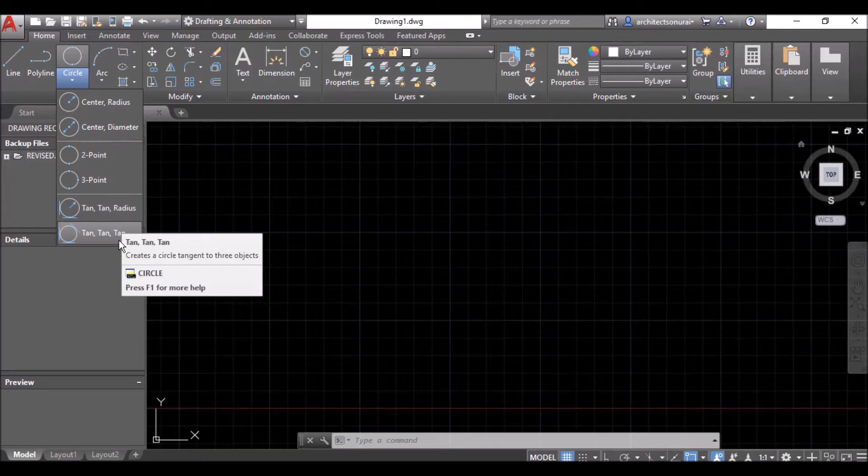If you go to your main toolbar, you will see circle and arc with a drop down arrow, meaning there are more commands than shown. If I select circle, you will see options: center radius, center diameter, 2 point, 3 point, tan tan radius and tan tan tan. In the arc there are also many commands, so we will discuss the important ones required for architects and interior designers. I am going to select center radius.

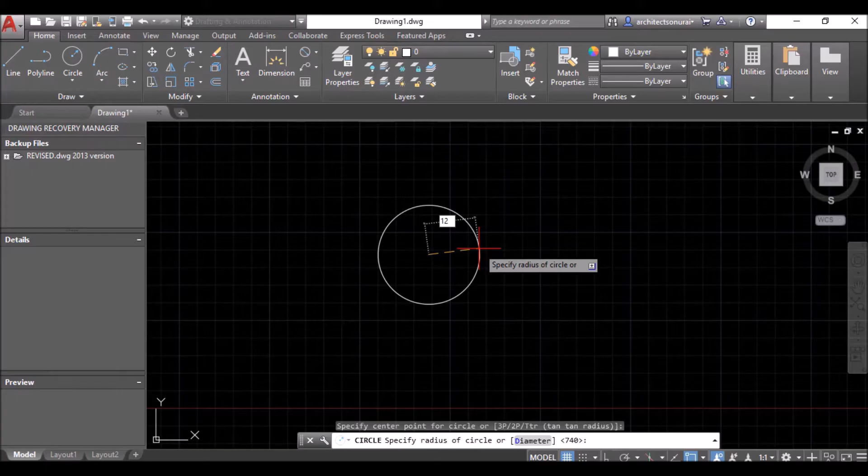If you click your mouse, it shows some information: creates a circle using a center point and a radius. You have to select any center point. I am selecting, and it says specify radius of circle. I am going to put any value. I am entering 1200, so this circle is made with radius 1200. If you want to cross verify, you can go to dimensions and take a radius here, and if you select, it shows radius 1200.

Next, if you select center and diameter, you have to select center, then enter the diameter value. If I enter diameter value 3000, this circle is created with total diameter 3000 and radius, that is half, 1500. If you want, you can check from here: go to dimension, select diameter, select this circle, and now it shows diameter 3000.

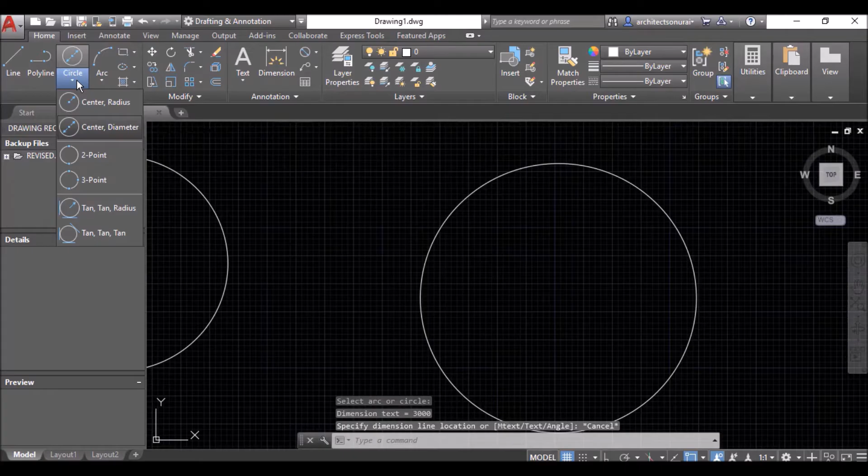Next is 2 point, which creates a circle using 2 end points of diameter. I am going to select this 2 end point of diameter. I am clicking here, and clicking anywhere, and it will create a circle using 2 end points as diameter. Also you can select a line, create any line and select the 2 end points of this line, suppose this is diameter, and create the circle by selecting the end points of the line.

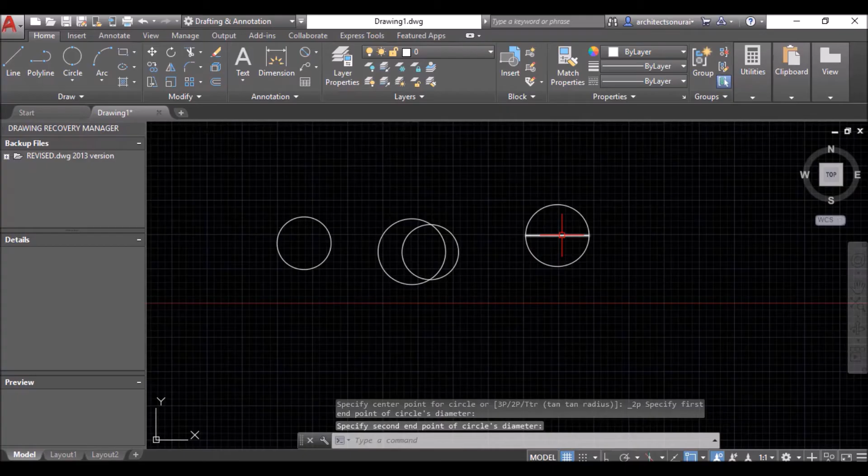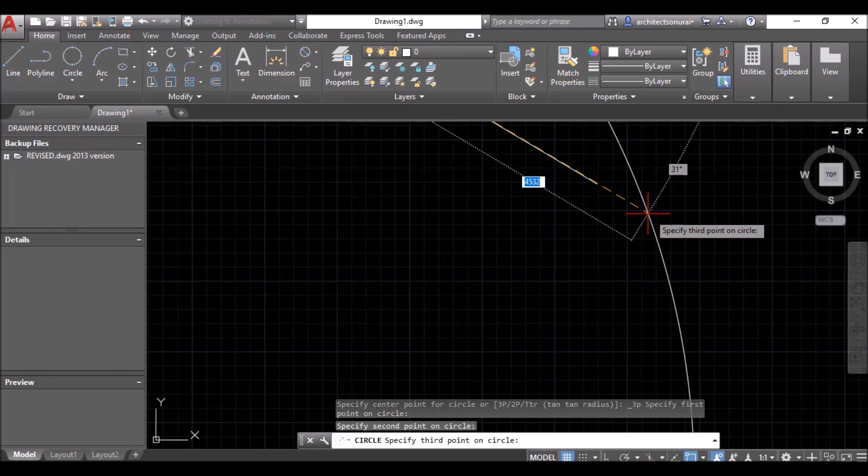Also you can create a circle by this 2 point method, and this is the 3 point circle. So if I select this 3 point option, I am going to create a line: first point, second point and third point, and select this 3 point circle. I select this first point, this second point, and this third point. So you can create a circle using 3 points.

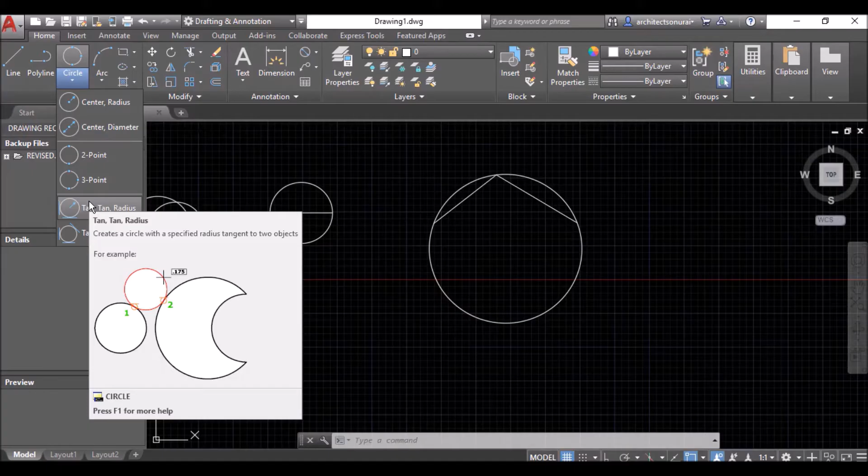After that, this is tan tan radius, meaning you can create a circle with a specified radius tangent to two objects. I am going to select this, and for radius I give 3000, and it will create a circle using 2 tangents, with the radius value you give. Again this is tan tan tan.

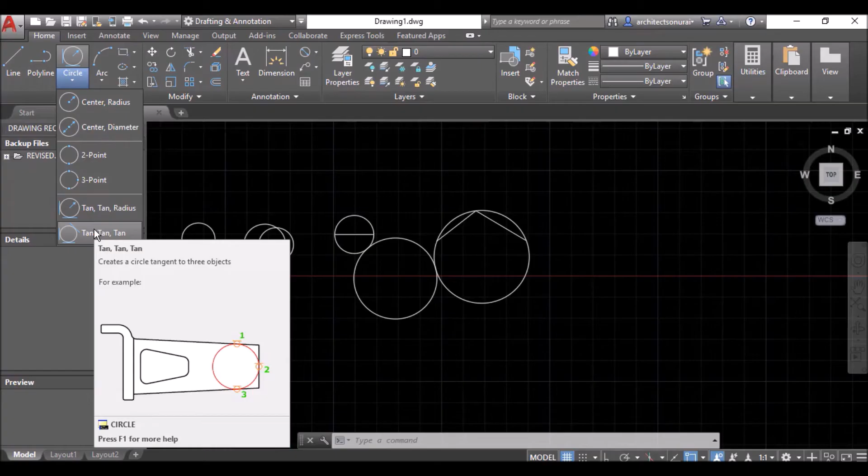This means create a circle tangent to 3 objects. I am going to select this first, second and third, and it will create a circle using 3 tangents. These are mostly useful, and you can use them in your designs and planning. Also you can take this simple center and radius option.

After that there is arc. If you select this simple arc, you can create whatever dimensions needed in your planning. You can create an arc without referring to points, and also if you want to refer, you can select this 3 point arc using 3 points.

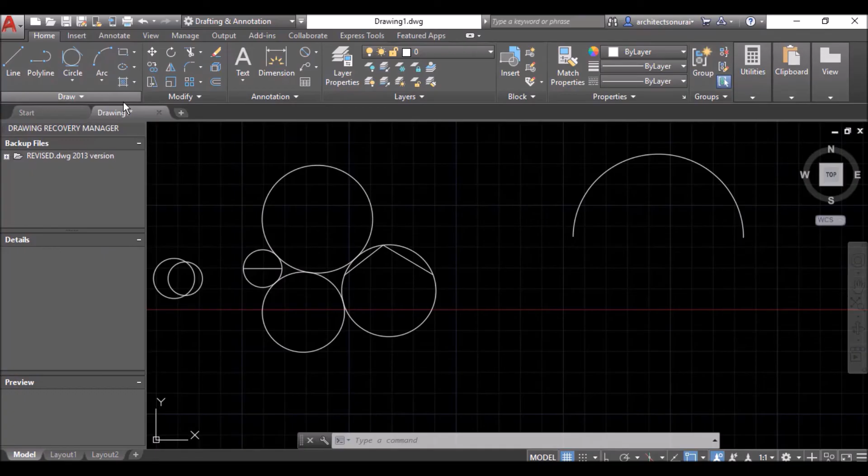So if I am making any line, first, second and third, and if I select this 3 point arc, using first, second and third, you can create the arc using this 3 point method.

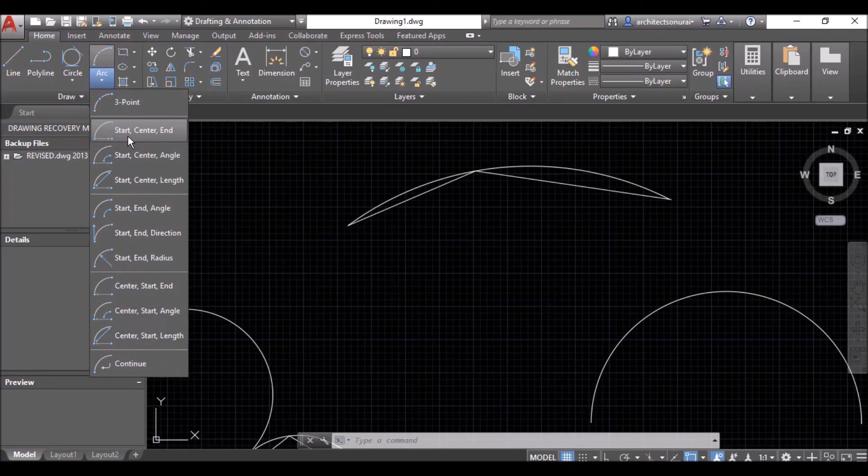And also there is start, center, end. That means you have to give a start point, then define the center, and it will create the end point itself. I am going to select somewhere, select this, give this center point, and I am entering 4000, and it will create the end point itself.

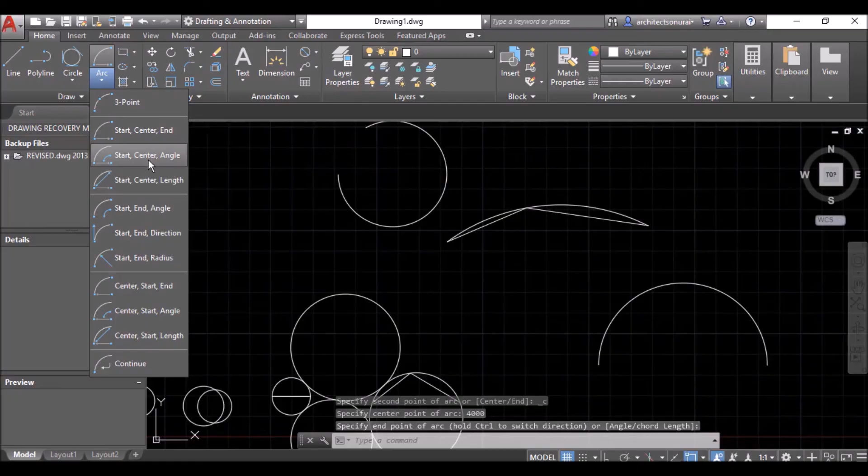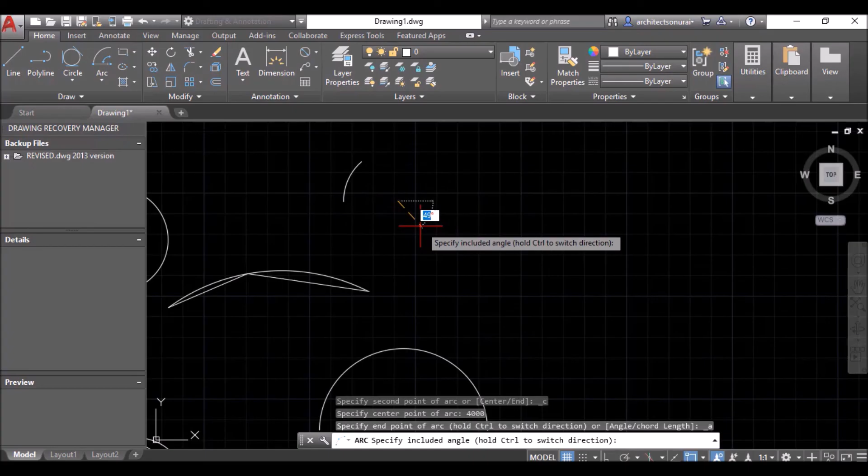And if you go to start, center and angle, you have to give a start point, then define the center point. I am entering center point value 4000, and now you have to hold the control key to define the side of this arc, and then enter the value of angle. You can see this angle changing, and I enter a value, that is 60 degrees, and you see the arc is created with a 60 degree angle.

There are more commands which you can refer to, but they are not that important if you consider architecture and interior designing.